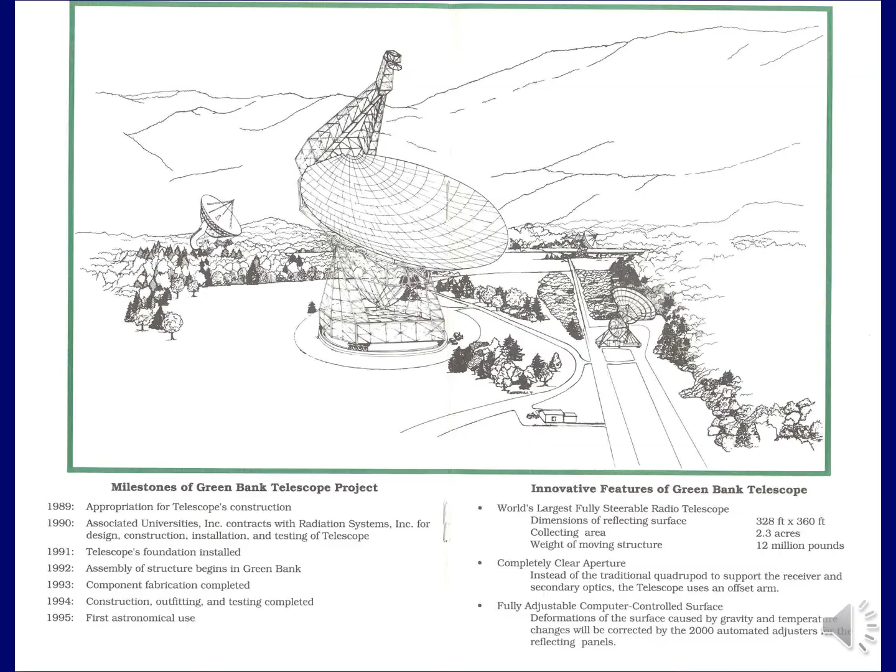We passed by it every day, going down and back, plus heard all the crane operators talking as they were doing the various operations and everything. So it was really quite interesting. We had kind of a great sidewalk superintendent position there.

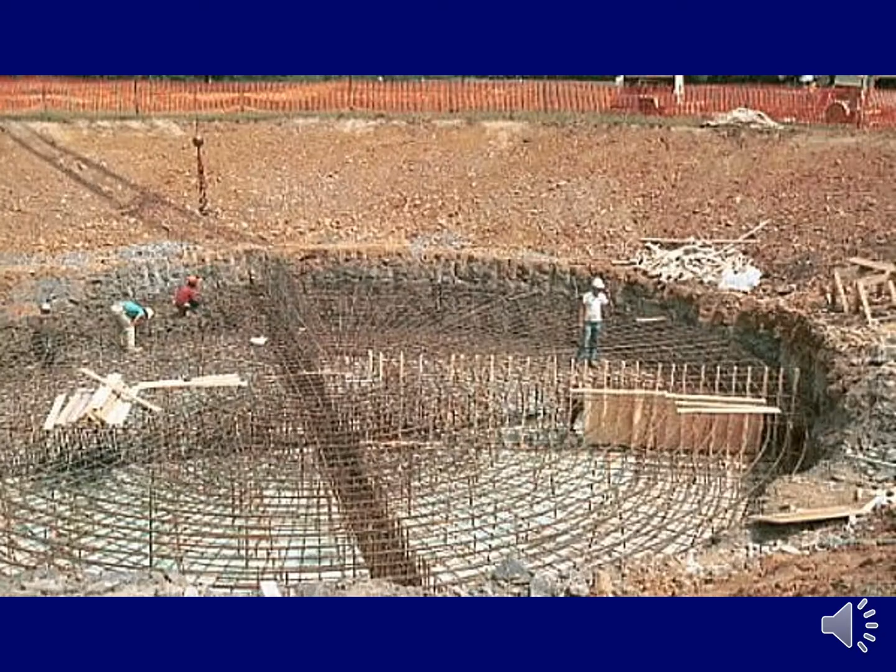Okay, getting to the actual construction, this is the pintle bearing. This is the pintle room to support the pintle bearing. It's a huge slab of concrete here, and you may wonder why was it so big, because the weight was actually carried by the track.

Well, actually, this was sized to carry the horizontal load, particularly the wind load. It was literally to keep the telescope from being blown off the tracks at, I think it was, a 90-mile-an-hour wind was the requirement. So you've got this huge pedestal buried in the ground just to keep the telescope from blowing away.

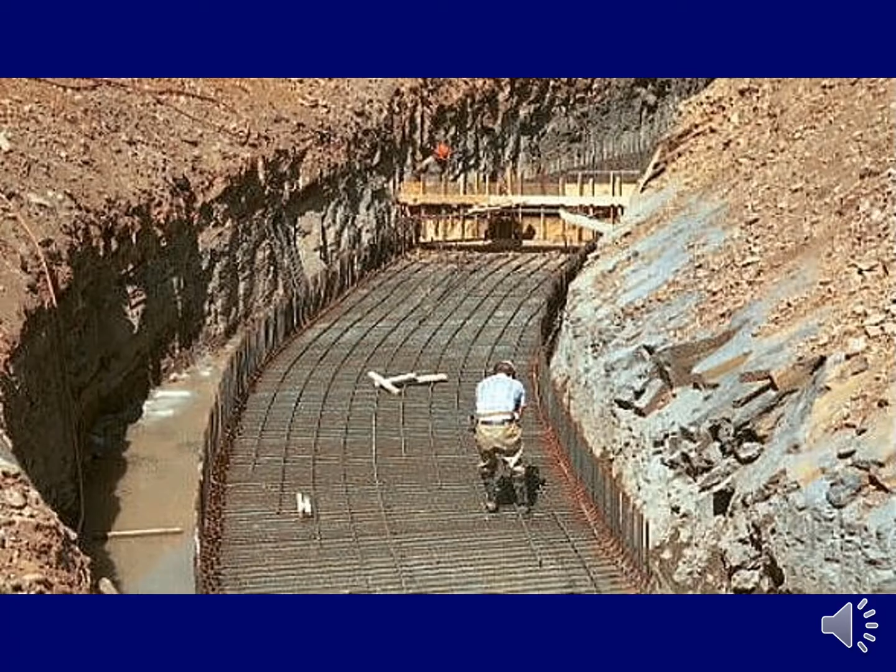This is the foundation for the track. Now, at the time, the estimated weight of the telescope was 12 million pounds. It kept creeping up and creeping up as it went, and later I'll show you when we weighed it, it was 16,727,000 pounds. So the weight had increased considerably.

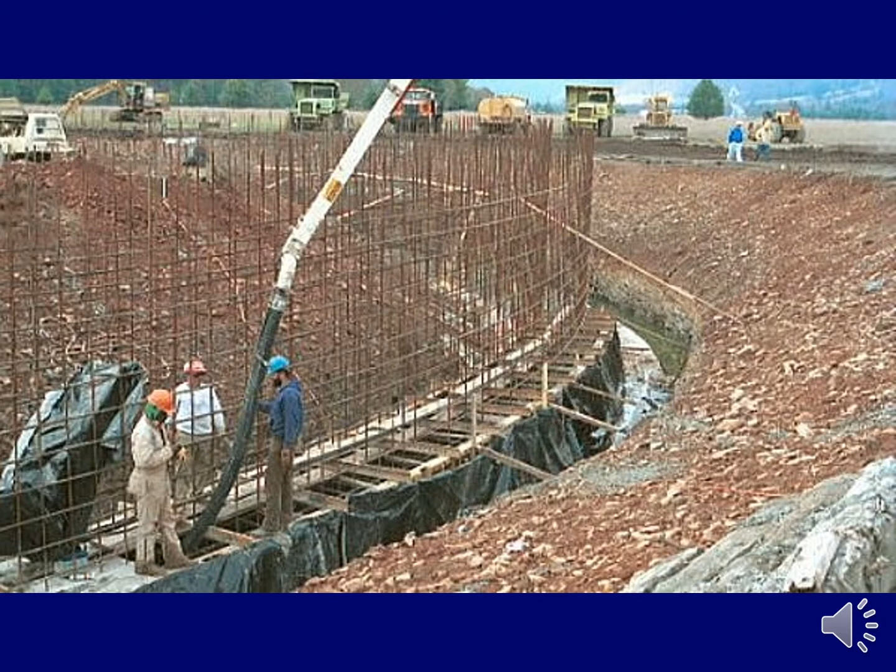But the foundation, the wall looked like a T structure, where this is the bottom of the T. And after they had poured this, they decided to make the vertical portion actually wider than it is at the top. So they added another foot to the vertical section down near the bottom. Don't believe that shows up quite here.

Another thing was the specification called for the foundation to go down to the shale. There's the layer of soil and then the shale down about 15 feet, I think it was. But it did not say that they had to be uniform, just down to the shale.

Well, the contractor, Radiation Systems Incorporated, RSI, that was the initial contractor. It changed hands a number of times. They kept getting bought by other companies, Comsat and Vertex, and I forgot who the last one that bought them. But anyway, it changed hands a couple of times during the process, but the crews all remained the same. They left this project alone, even though they bought the parent companies.

But they made the track even all the way around, which turned out to be fortunate because of the symmetry. If different parts of it had been different thicknesses, you'd have a different spring constant, so to speak. But as it turns out, it's uniform all the way around, and that was just a fortunate thing.

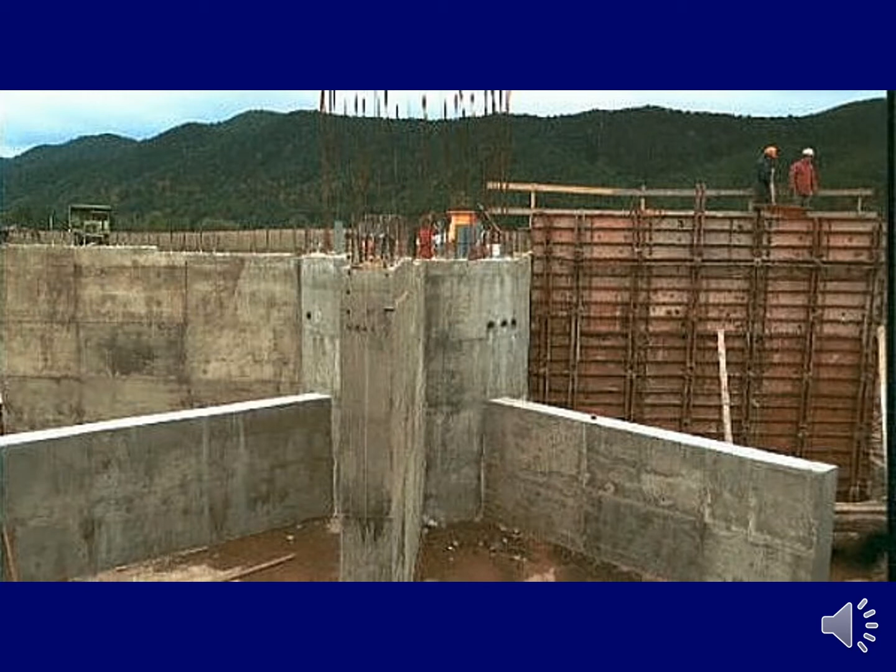Notice these grade beams. There's still 4 grade beams exposed that you see, but there's 4 more underneath the ground that you don't see anymore. This was really designed to be a sturdy pintle room, to, like I said, take care of the horizontal load of the wind on the telescope.

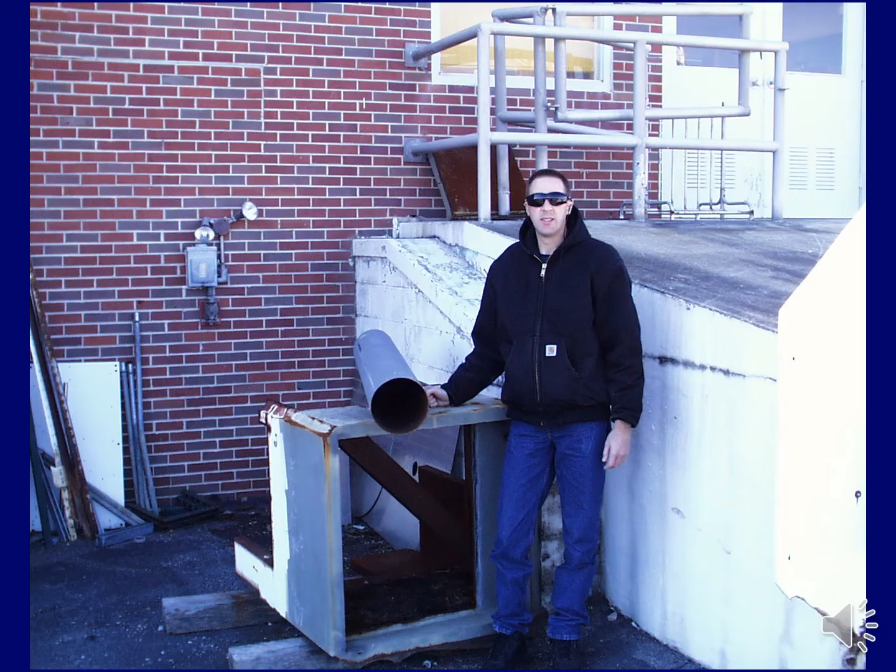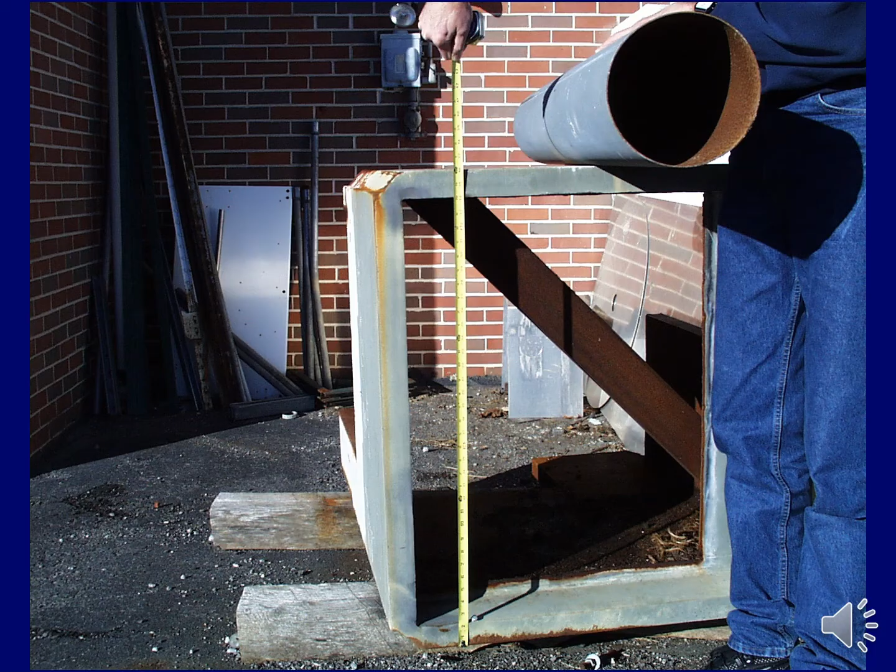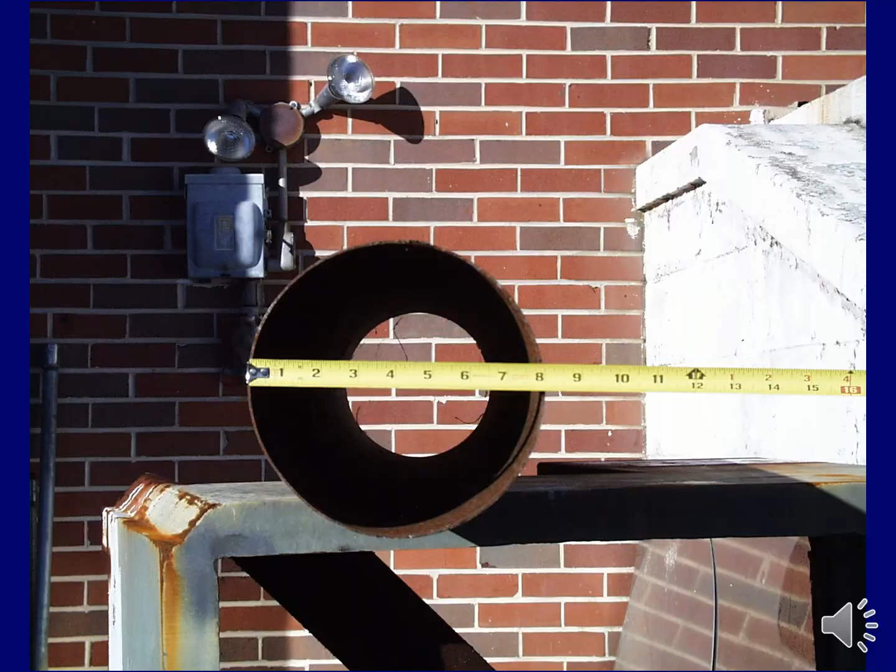After the project was winding down, we scavenged some pieces from their scrapyard before they were all hauled away. What we got here is the 2 largest and smallest pieces of structural steel. You see the bottom one there is 2-inch thick plate, 36 inches square, and the lightest part is 8-inch tubing. So when you're up on the very top of the telescope, that's what you're being supported by, something that looks almost like a beer can.

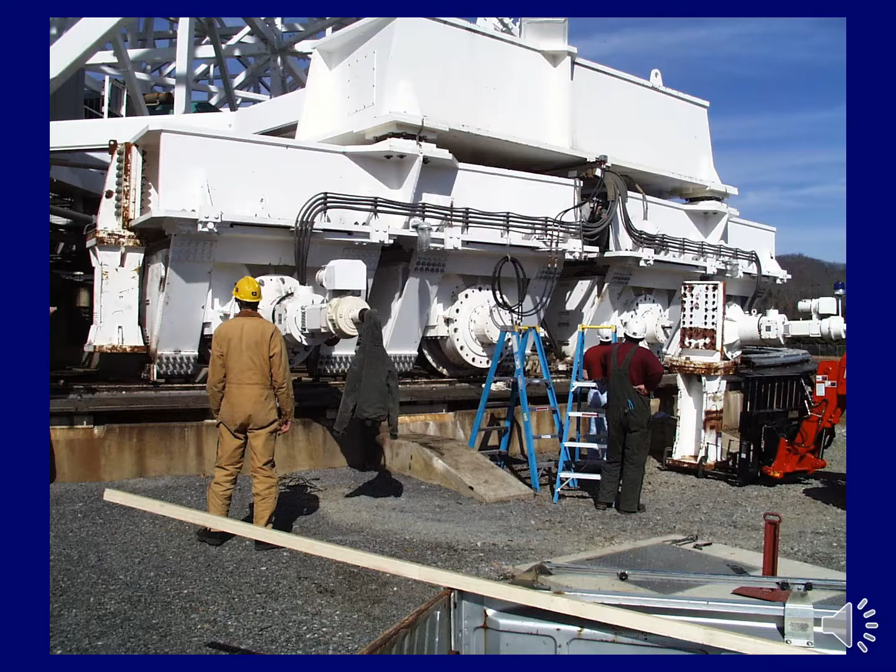One interesting aspect from the metrology standpoint is the wheel system. There are a number of features here that might go undetected, but when the wheels were turned at the factory, they were cut on a taper so that the wheels are actually cone-shaped. If you were to just have one of these wheels and rolled it around, it would naturally roll in a 105-foot radius. So there's no steering needed to keep the wheels in line.

And the way that was set up, on the end cap of the wheels, right here, you take this cover off, the shaft is actually bored out all the way through. And in the pintle room, there were 4 openings that were left, one in each quadrant of the pintle room, and the door opening. And so you could slide an alignment telescope into the bore of the wheel, which put it right on the axis of the wheel.

You sight through the telescope into the pintle room to a point that's at the same elevation as the track and in the center of the pintle room. In the floor of the pintle room, there's a brass marker with a punch mark in it. That's the main coordinate that the telescope was built by. Everything worked from that brass benchmark inside the pintle room.

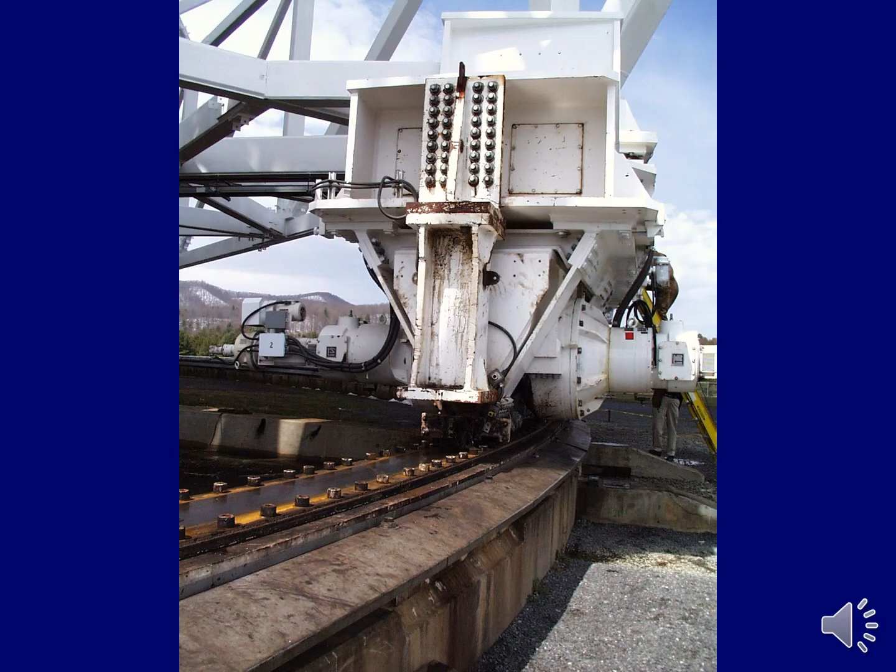When the wheels were first aligned and placed on the track, Bob was very concerned about the taper, to make sure that it had this 105-foot radius taper. And so he asked us if we could measure the taper on these wheels in place. And so after some head scratching on how do you tell if the tilt is due to the track or the wheels, to make a long story short, we did come up with a method to actually measure the taper of the wheels. And it turns out one of the wheels was out of spec.

15 of them were good. One of them was out of spec. It had to be removed. They had to put the telescope up on blocks on that corner, pull the wheel out, send it back to the factory, have it returned, and brought back. Fortunately, this was found early on while they were still building the Alidade, and it didn't cause a big problem because normally they had to turn the telescope as they were erecting the steel. They had to rotate the telescope underneath the crane. So it turned out to be quite fortunate that we caught that early, and they were able to leave it parked.

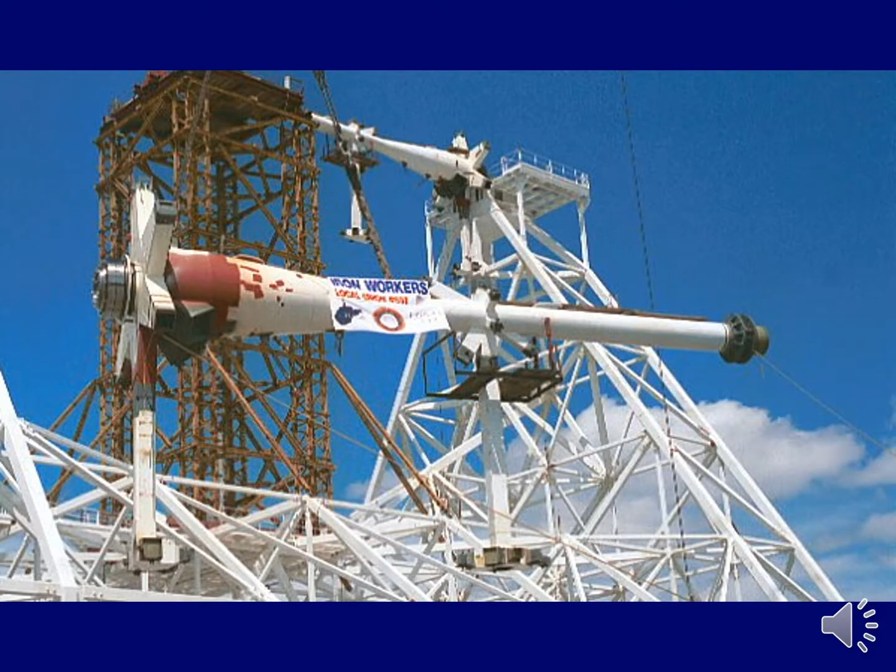Okay, we're at the point here where we're getting ready to put the elevation shaft in, but let me back up some things that happened prior to that. According to the finite element model, they knew how much these towers were going to deflect under load. So with no load, they wanted these towers, I think they were something like an inch longer or more space than the shaft. So when the shaft was actually completed and put in, they had to use a jack and pull the two towers together in the unloaded position. And the idea being, when the rest of the telescope was completed and the loads were all redistributed, the thrust load on the bearings would essentially be zero.

One of the things that happened, and I don't remember exactly the details, I wasn't involved in it, but one of these members got out of alignment during the welding and construction. And so they needed to literally bend one of these members to get it back into the proper alignment. So one weekend a specialty contractor came in, and he actually bent this big member back into the proper alignment by heating it.

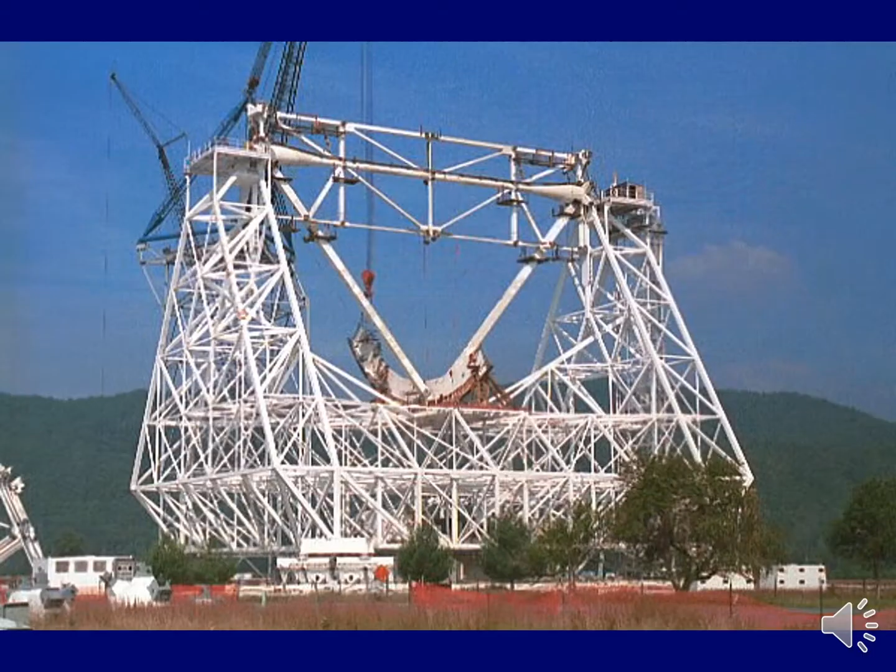Here you see things progressing on what's called the box structure, the part that rides on the elevation shaft. Now, I mentioned earlier that the center of the telescope was determined by this place in the pintle room. Well, there was a plumb bob on a music wire that was hung from the alidade that hovered right over that point in the pintle room that determined the center of the telescope for the surveyors to keep their benchmark. So everything was built based on that point in the pintle room until it became covered and you couldn't see it.

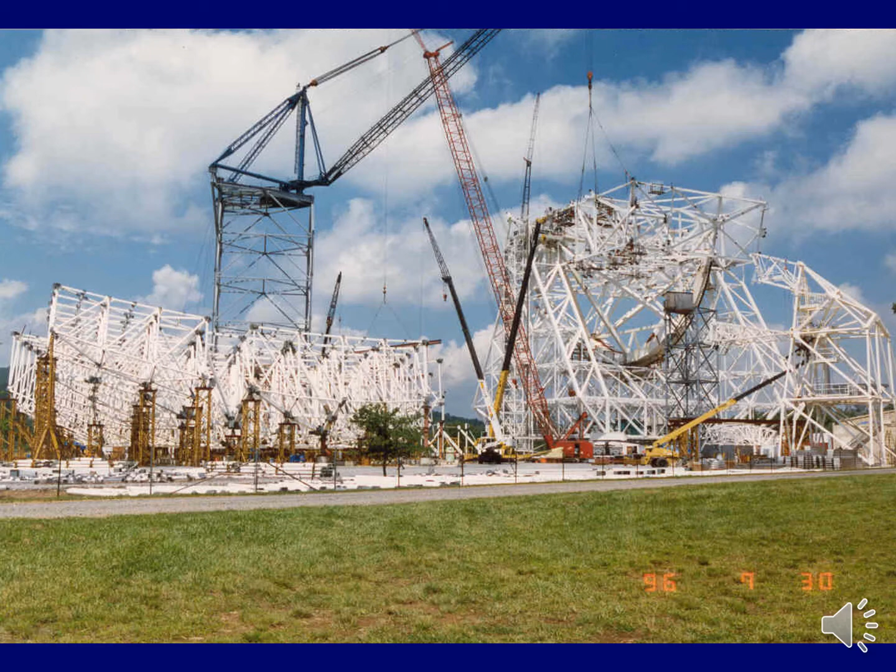Now you're starting to see the bull gear being added in these diagonals. So while this was going on, building the box structure it was called, there were other parallel things going on. Over here you see the top of the feed arm. The top of the vertical feed arm is being fabricated down here on the ground on solid anchor points, so that this would be pre-outfitted with the actuators for the subreflector and so forth. And here you see the subreflector being put together.

Over here, the backup structure, the part that holds the panels, the reflector panels, is being built. And right here, this tower, right up here is where the surveyor worked. This would be the vertex of the telescope, of the reflector. So the instrument man sat up here at the vertex and directed the alignment of the backup structure.

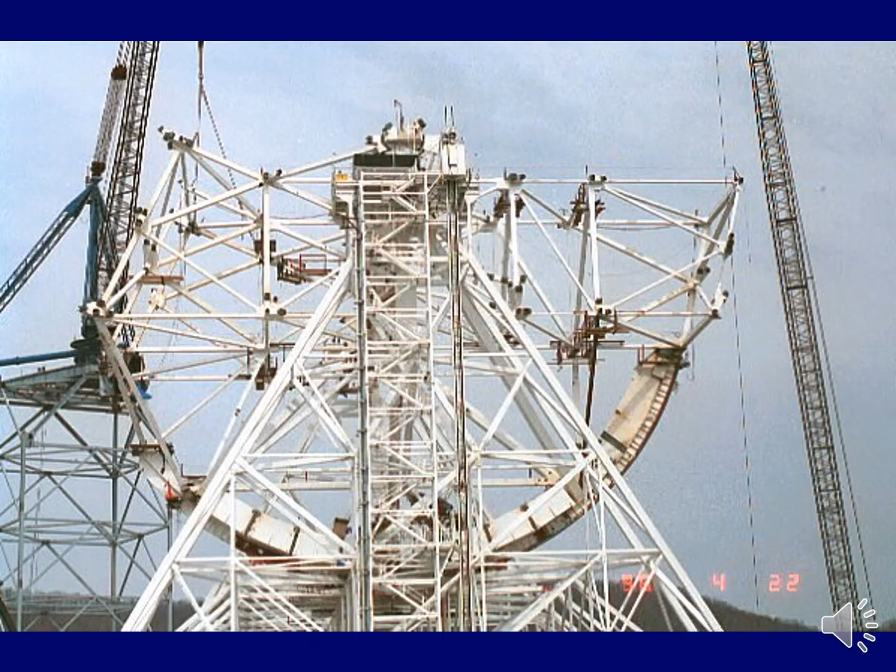Now you see the box is beginning to take shape. There's still one more layer to come out of the paper, but it's taking shape, and the bull gear is being installed still, and you can see the beginning of the horizontal feed arm where it's going to go out to the left here.

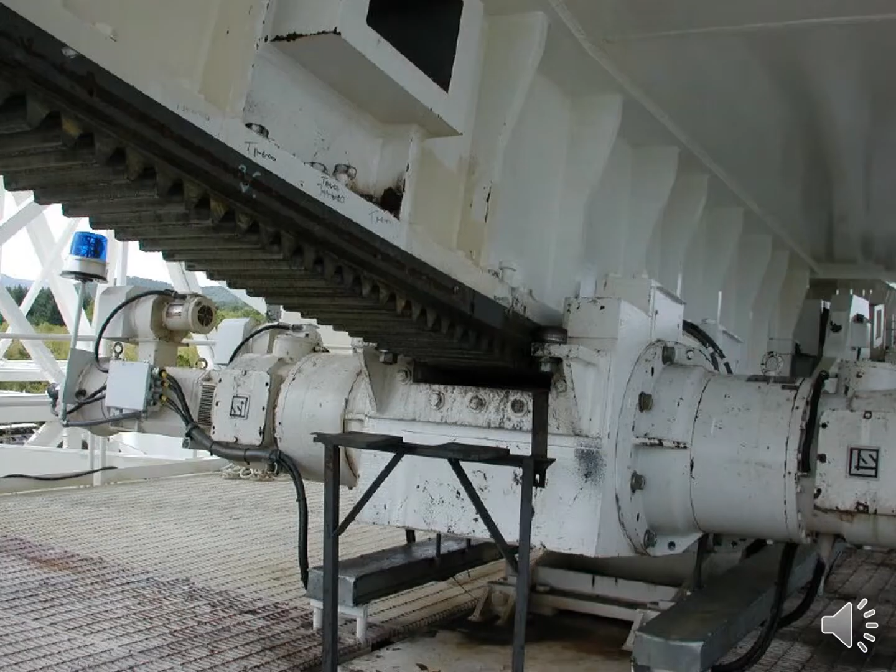The bull gear is an interesting arrangement also. A lot of thought went into the design of this. The bogie that drives the gear, the pinion, is actually pivoting on an arm back behind here that you can't see. So this is actually on a lever arm, and it rides on the gear itself with these cams to keep it... the transverse motion. And there's another cam you can't see here that rides on the gear itself, on the top part of the gear. It's not a good view, but the gear is wider than the flange that's holding it. And so they had this elaborate procedure to align in and out on the bull gear with shims and so forth that fit under here.

And so this thing was lined almost perfectly until they actually operated the telescope, and what they found was that the gears shifted circumferentially. The design was very big on the radial control, but it kind of ignored the force on the gear, and so this all had to be redesigned. The mounting mechanisms, and I don't remember exactly how they did that. I wasn't involved in that part once we determined what the problem was. But they had to add some additional fixturing there in order to hold the gears in the circumferential direction.

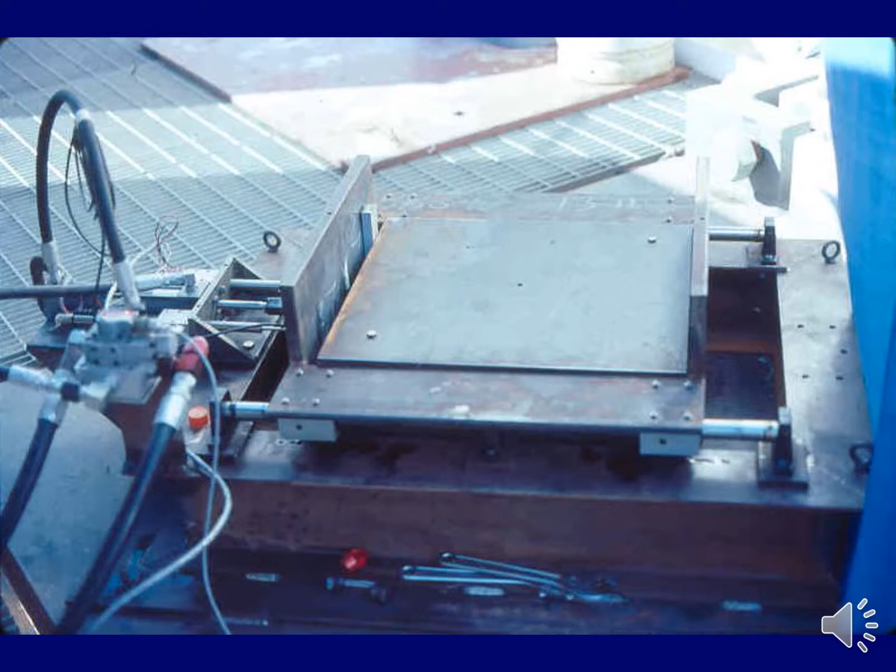And so John was really concerned about the thing ringing like a bell. And so he convinced Bob Hall that he needed to run a test, because they had estimates for what the damping coefficient was. In other words, if you pluck it, how long would it take for it to ring down to an acceptable level? So he convinced the project manager to let him run an experiment.

So he built this shaker machine. It's a hydraulic cylinder with maybe 1,000 pounds of weight on it, and it would oscillate back and forth. This was put up on what they call the dance floor, the top of the elevator there, near the elevation bearings. So he convinced them to weld this thing down one weekend and let him play with it with the telescope, when it was at about that stage that I showed where the feed arm was completed.

I wasn't involved in that either, other than one time I did go up there when they were running an experiment to observe, and they started oscillating this thing back and forth, and nothing was happening, and then after a few minutes you could begin to kind of feel the handrails wiggling, and a couple more minutes, it's like, I can feel this for sure.

And a couple more minutes, there was a shack where the ironworkers hung their tools and their belts. I looked over in the shack, and all the tool belts were just swinging back and forth. It's like we were in a ship. So I'm starting to get nervous. And John's just happy as he could be, getting his data from accelerometers.

I'll never forget that. I was just thinking, I didn't want to have to call Bob Hall and tell him we broke the feed arm off doing an experiment. But it turned out to be useful data, because he experimentally showed that the damping coefficient was only about 1/2 what they had estimated. They were off by a factor of 2. And so that gave the design engineers a little indigestion.

Another thing was the way the contract worked. The NRAO provided the actuators. Most of the actuator companies build the actuators to do a vertical lift against gravity. In this case, the actuators not only had to move in a piston motion, they had to resist forces perpendicular to the piston motion, because the panels are connected to this actuator, which is connected to the backup structure, and you're shifting it from 5 degrees to 95 degrees elevation. You're carrying the weight of the panels, in some cases, in the plane perpendicular to the piston motion.

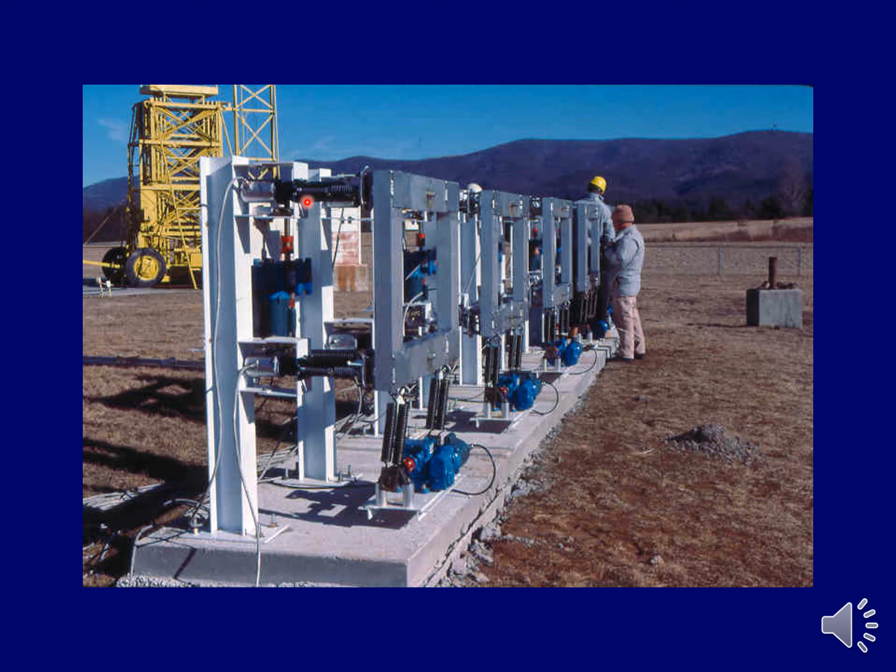So they solicited proposals from a number of companies. I see 5 test fixtures here that were constructed to basically exercise the actuators. Here you see two actuators. I guess there maybe are four altogether on this rig mounted horizontally, and there is motion put into them through this. There's a cam mechanism here that basically puts side forces on the actuators.

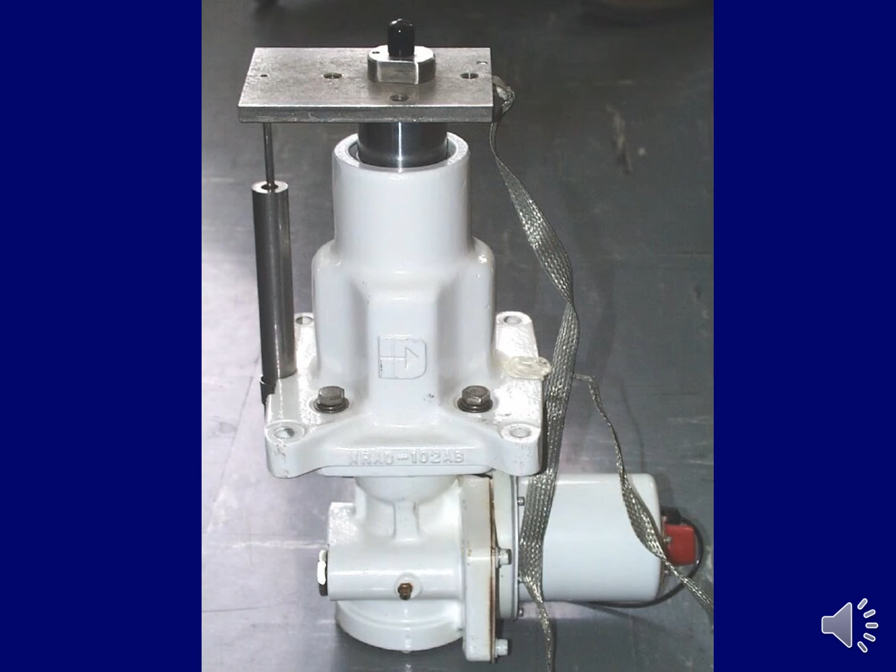Again, I wasn't involved in that part other than just watching, but I think all of the manufacturers failed except one. The survivor was the company that wound up on the telescope today, and you can see this is really quite beefy. The actuator is a casting, heavy duty, nice thick shaft. This is the extra mounting for an LVDT that NRAO added.

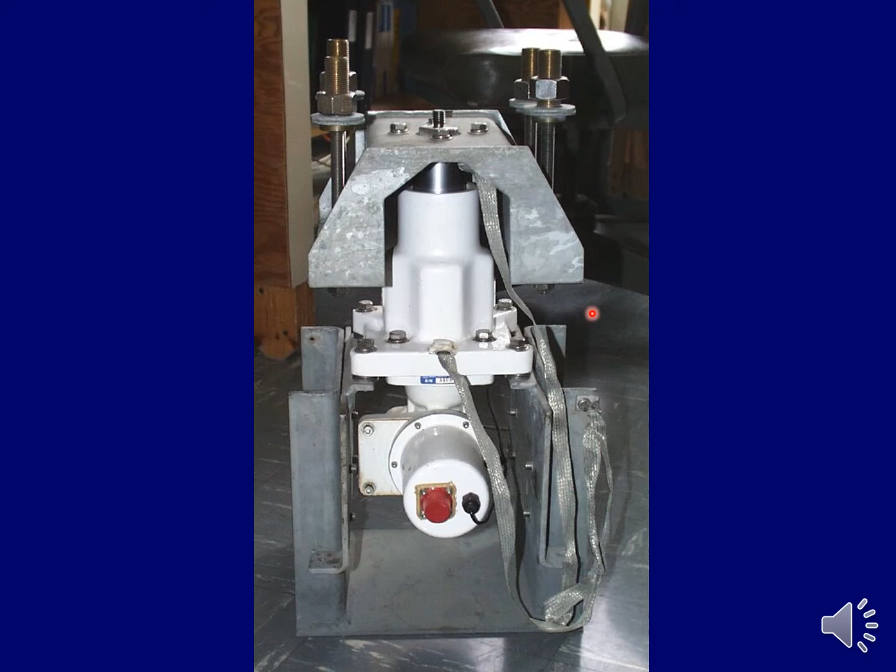Here you see the arrangement with what they call the hat bracket and the actuator bracket. This bracket here fit on the backup structure, and it was initially bolted to the backup structure, and these two halves, there was a lot of adjustment between this part and this part, so you could manipulate the position of the actuator. Once the position of the actuator was finalized, they came back and they welded all of this down so that there was no chance of it moving again. The only bolted part would be the actuator itself.

The panels sat on these studs, and there's this bushing right here that's threaded on the outside and the inside. The inside threads thread down on this stud, and so to attach, the panel fit between these two washers. There was a special wrench that went into the bushing. You could turn the bushing and raise or lower the panel, and then once you've done that, you needed to adjust this jam nut to hold it in place, to lock it.

And so there was a special tool developed. I think Tim Weadon did that when he was doing the panel setting. And also on the actuator, there were special provisions for this stud right here to attach the panel setting tool, which Tim Weadon will talk about more. But the bottom line is all this was pre-designed and built into the telescope way before it ever came down to setting any panels.

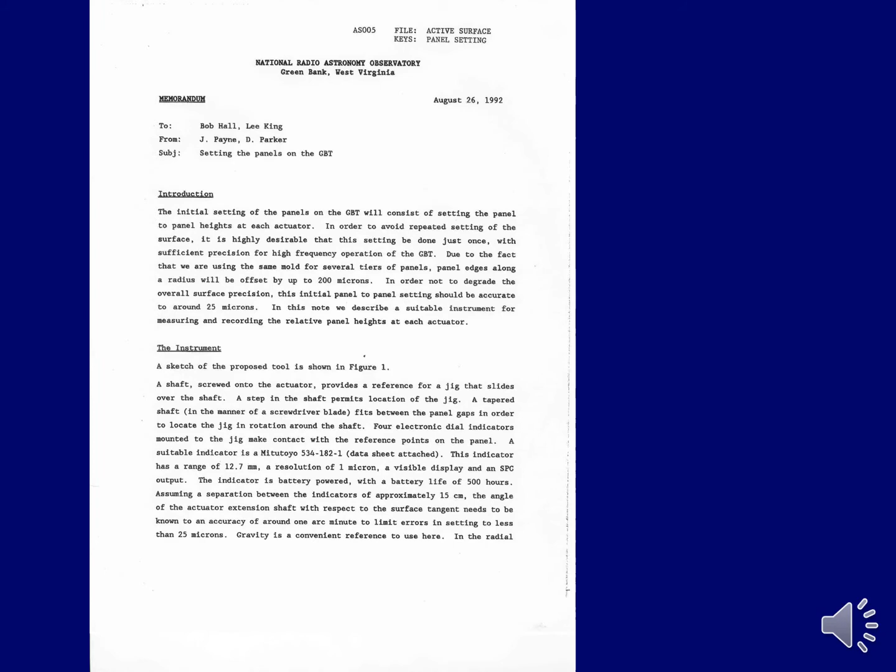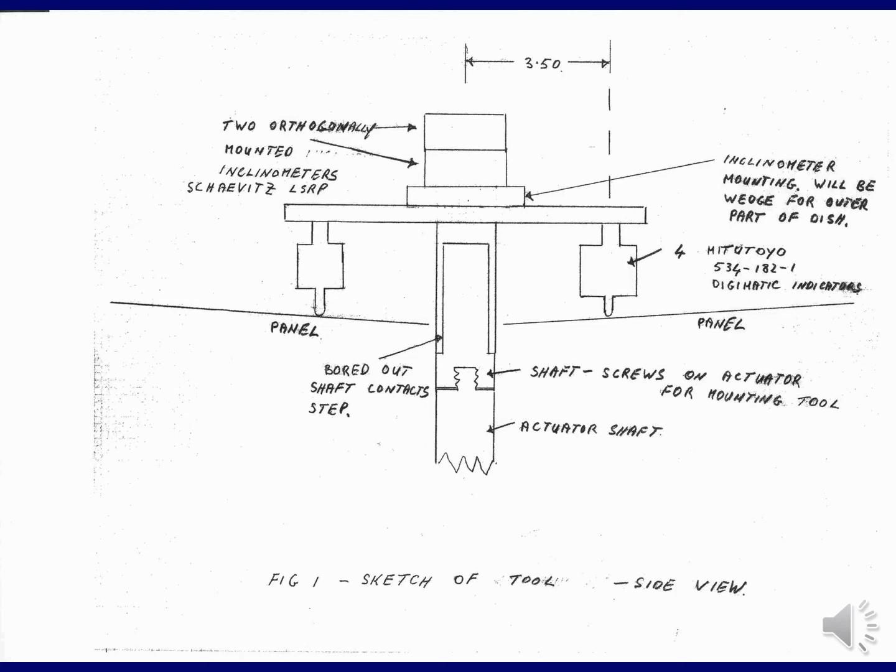Well, John realized that we could do better than that, and back in '92 he proposed a better way to set the panels, including a sketch of how we would use digital indicators and inclinometers and attach it to the top of that stud that I just showed you on the actuator. And there'll be much more about that later. This is one of the more successful parts of the innovation. But all this was built in.

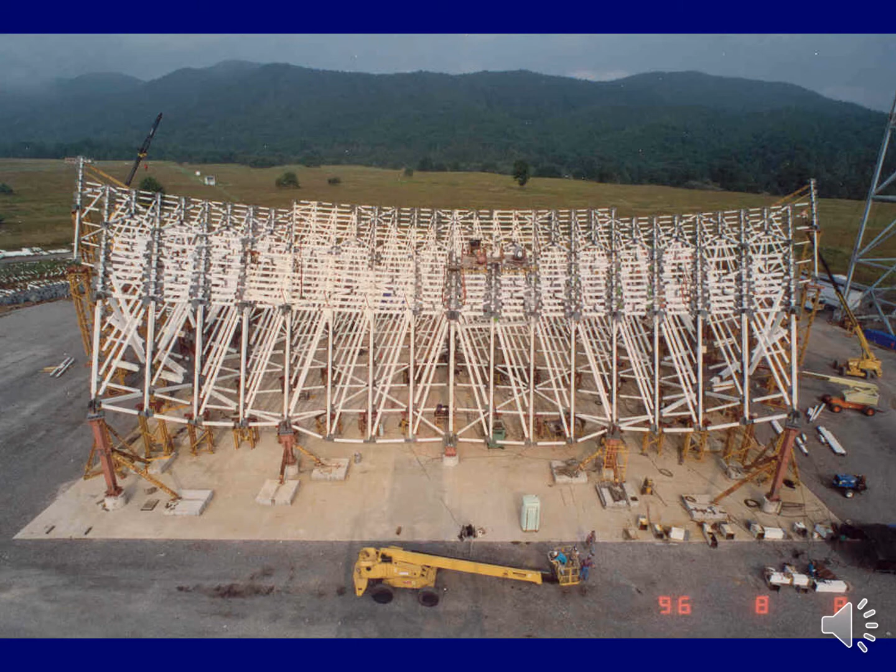So when they were building the backup structure down here, it was built on a combination of hard points that would match the hard points on the box structure, in combination with temporary supports for the points as they built it out. This was a very, very interesting part too, because these points had to match up the angles and everything with the mating points on the box structure. And it turns out there were some problems there. You can see better.

There were only a few points that matched to the box structure, and this was built at one angle. I don't remember if this was the bird bath, or I think this was called the bird bath, or it may be the rigging angle. There were two different angles that they used, and so one of the tricky things was the geometry.

Every joint in this backup structure is unique. There is a left and a right version of each one, symmetric about the center line. But other than that, every joint is totally unique in order to make it match up to these hard points. The shop drawings to generate these joints drove them crazy. This was a major headache. Unlike most things where you have symmetry and you can build 30 of one piece or something, every one of these had to be custom designed.

The story that I heard was that they had a summer student that was really, really good at the geometry and really understood how to do these and could whip them out. Well, comes the end of the summer, they're not finished with all the shop drawings. And the student's getting ready to go back to college. And so there was a panic. This is the way I heard the story anyway.

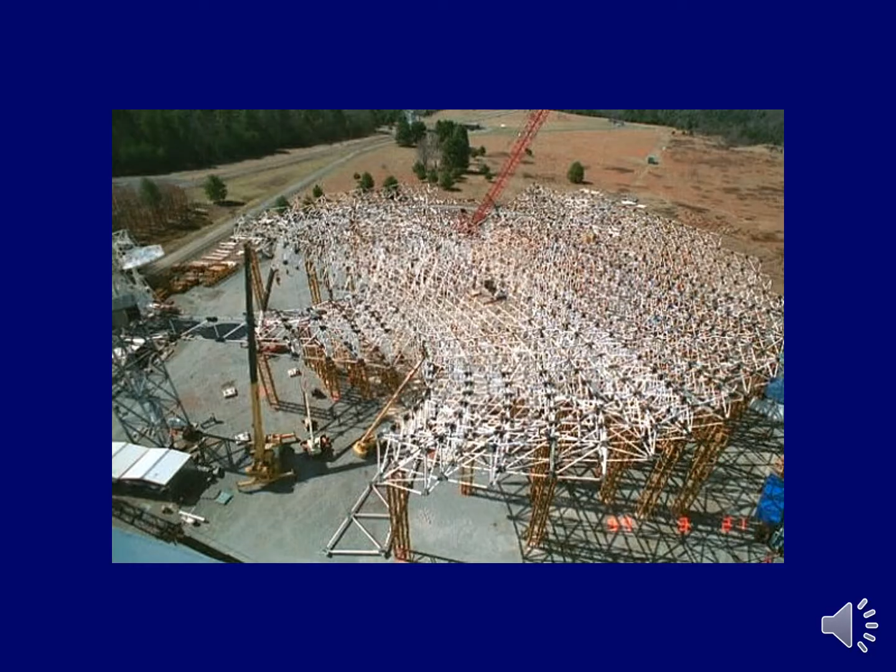And so they basically approached the student with an offer he couldn't refuse. I think it was something like a year's tuition or a year's college expenses to stay over through the fall semester to finish it, which he did. I guess he was probably pleased with how it worked out for him. But that could have been another major delay trying to find somebody else that could do those drawings.

Here you see a little more progress on it. Here we are about complete. Now, one of the things that was also confusing that began to show up as they got closer to the vertex is that if this was aimed at 90, if this was built at 90-degree elevation, the top chords and the bottom chords would be directly on top of each other.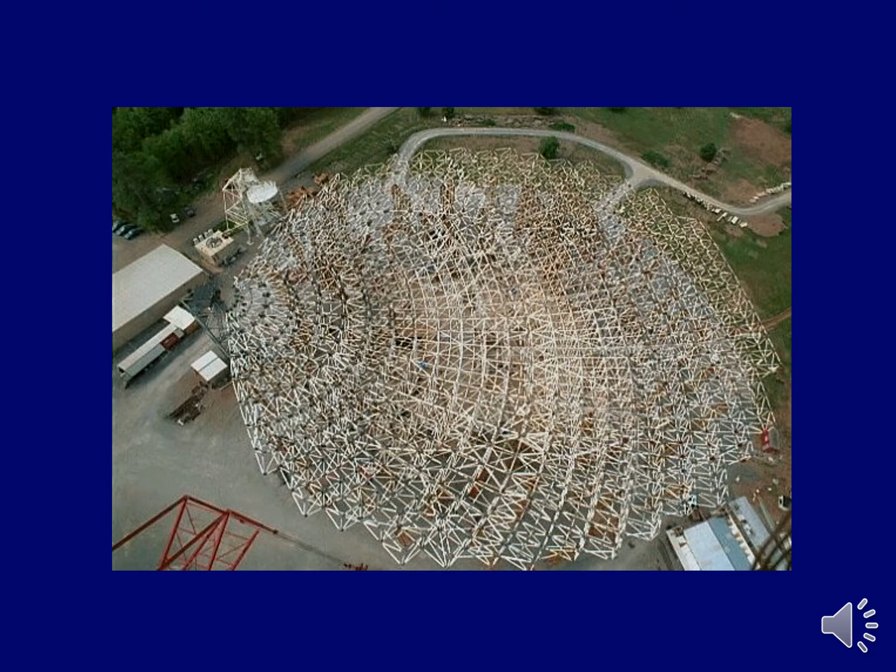But since it's built at a different angle, you can't use a level to align between the top and the bottom. And so as they got closer to the vertex, is the way I remember it, things got so far out of alignment that they were questioning, like, wait a minute, is something wrong with these joints or something? These aren't plumb. And then it's like, oh, yeah, they shouldn't be. And so then it was like, well, how many of them did we make plumb that shouldn't have been plumb? And so they had to do quite a bit of rework there.

Well, then it came to breaking the thing apart in segments and putting it up on the telescope. Originally, they were going to contract with a super duper crane to come in and do that job. But as the project slipped, that crane was no longer going to be available. And you may have noticed it was beyond the reach of the derrick. They could reach half of it from the derrick, but not the other half. And so it left them with quite a problem of how do we get it over to the derrick to pick it up. We could move the telescope underneath the derrick to place it where we wanted it, but we couldn't get the pieces to the derrick.

So they had another solution. They initially thought they would put in a temporary guyed derrick crane in the center of the backup structure, and from there they would hand the pieces over. Well, when the guyed derrick came in, at the same time, there were huge blocks of concrete buried in the ground at various locations away from the telescope that were dead man anchors for the guyed derrick. But when it came in, the guyed derrick had a lot of rust and pits, and the ironworkers threw up their hands and said, we're not going to do this. We're not working with that. You got to do something else. So, okay, they scrapped that plan, sent that thing back to the junkyard, and covered up all the concrete blocks.

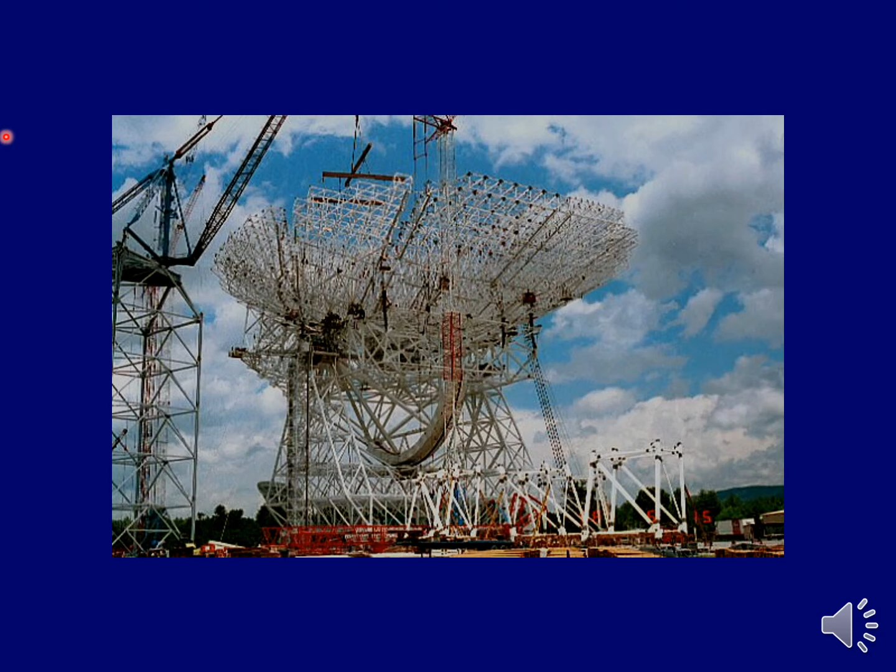Another interesting thing was how they had to rig these sections. These things were delicate, and they had to be suspended in such a way that when they were brought into place, they were just about perfectly in alignment. So it took a lot of thought on the rigging. You see one spreader beam that's picking up two other spreader beams that are picking it up at four places. So basically the module was lifted at four places in a particular arrangement. There were come-alongs between the spreader beams, and so the lengths of those cables from the come-alongs had to be just right to make it hang in the right way. And of course, everything had to be balanced because the laws of physics require that. So they did a lot of head scratching on the rigging to pick each piece up.

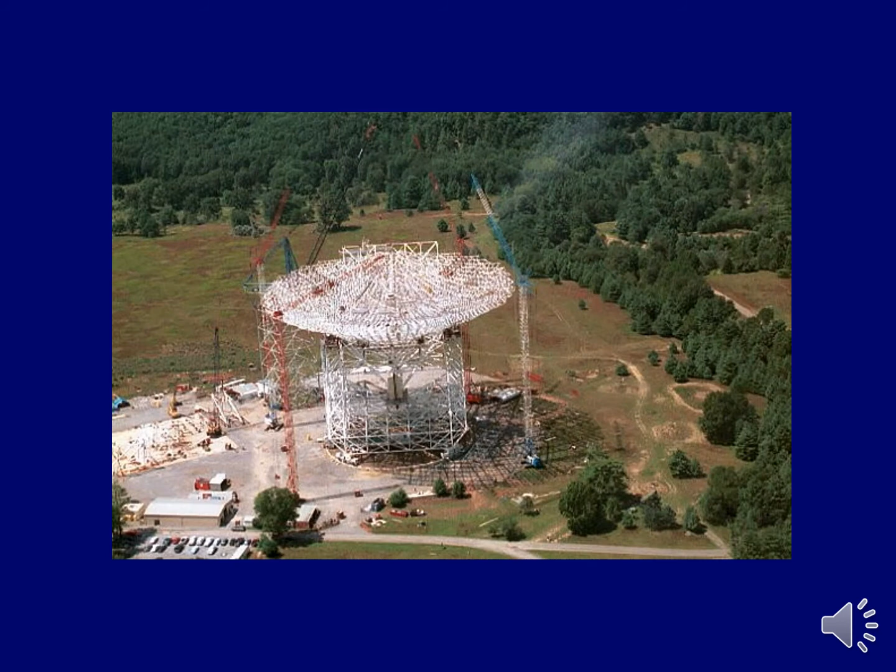Here you see we're about finished with getting the backup structure. That was a major milestone. And it had been over here on this pad. You can see the reach from the derrick could not get to the ones over here. Once the backup structure was complete, then they started building the vertical feed arm. Here you see the vertical feed arm nearly complete, and here's the top of the vertical feed arm over here off to the side.

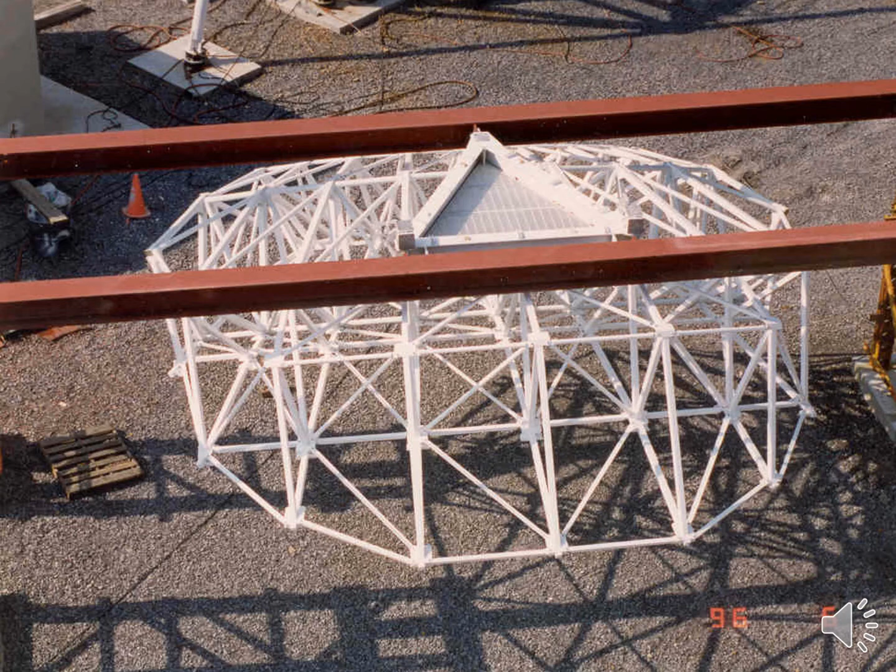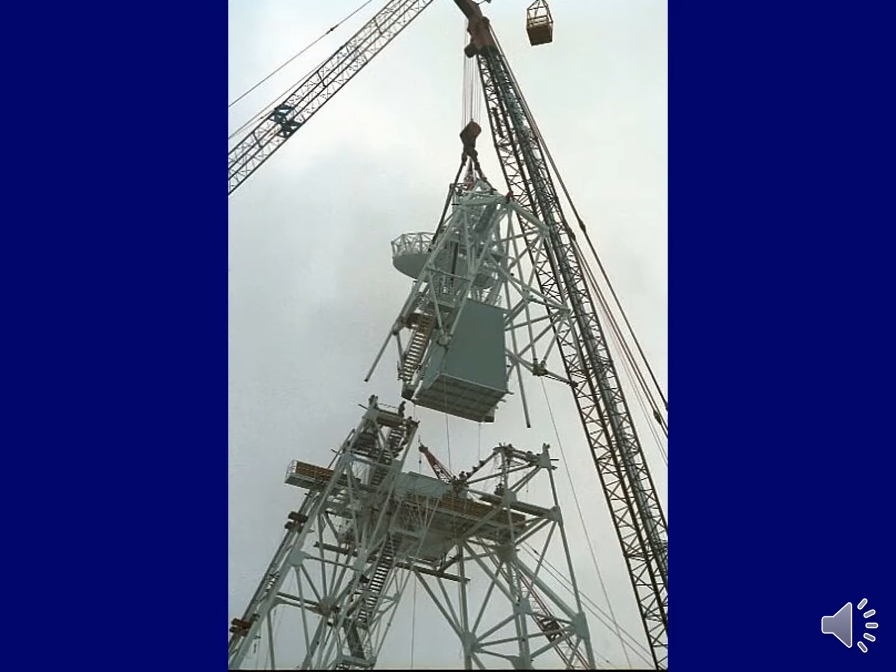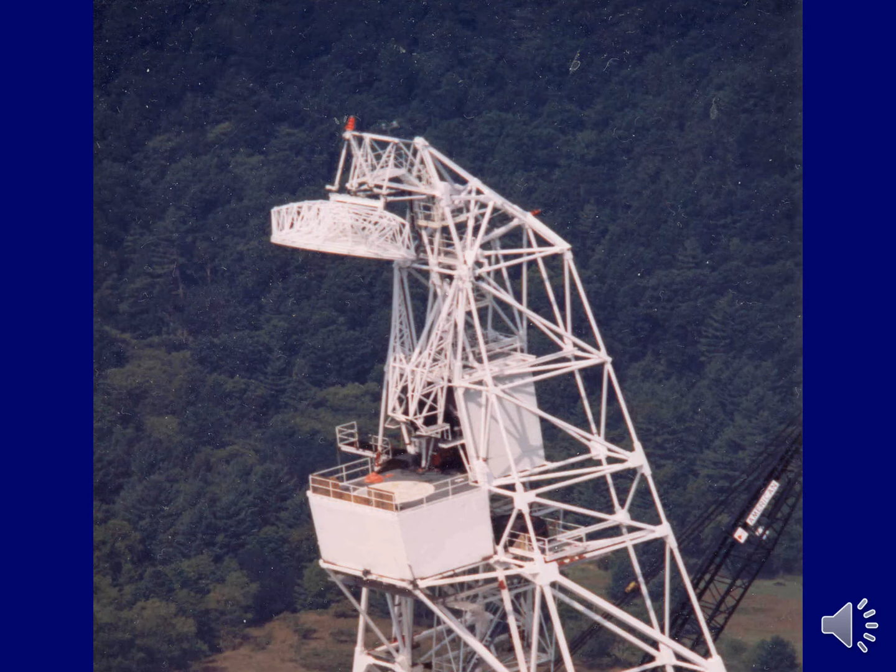Another view. The receiver room was added next, I guess, after this part was in. Another view. You can kind of see some of the symmetry. If you imagine the vertex was 4 meters back over here, you can see that there is a radial symmetry back to this point over here.

And there is a circumferential symmetry on the top chords. The problem was that it had to meet the weldment on top of the box structure. Going back to that, when they first brought the first parts up, they didn't meet. They didn't match. The hard points on the backup structure did not fit properly to the box structure, and people didn't talk about it too much.

But I think what I heard was that there was a foul up between the two design groups in what angle it was being built at, the bird bath or the rigging angle, and so pieces didn't fit right. Moreover, when they started cutting into some of those joints to modify them, they found that inside the joint it wasn't built to the specs.

There were some stiffeners that were supposed to be inside those boxes that were not there, and they only found that because there was an error and they had to cut into it to modify some things. So the net result was, to correct that problem took probably a year, added probably a year to the construction schedule. Major problem.

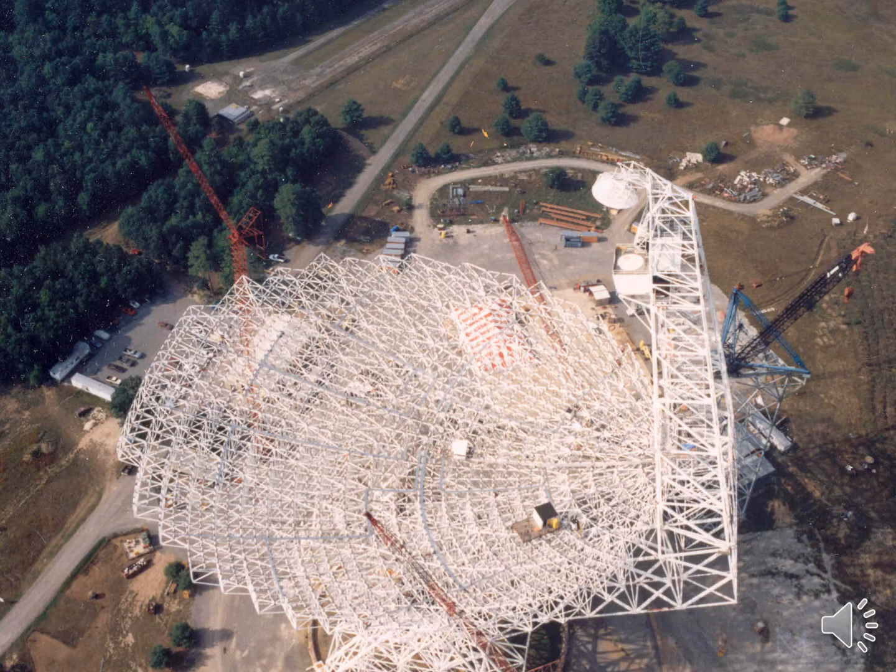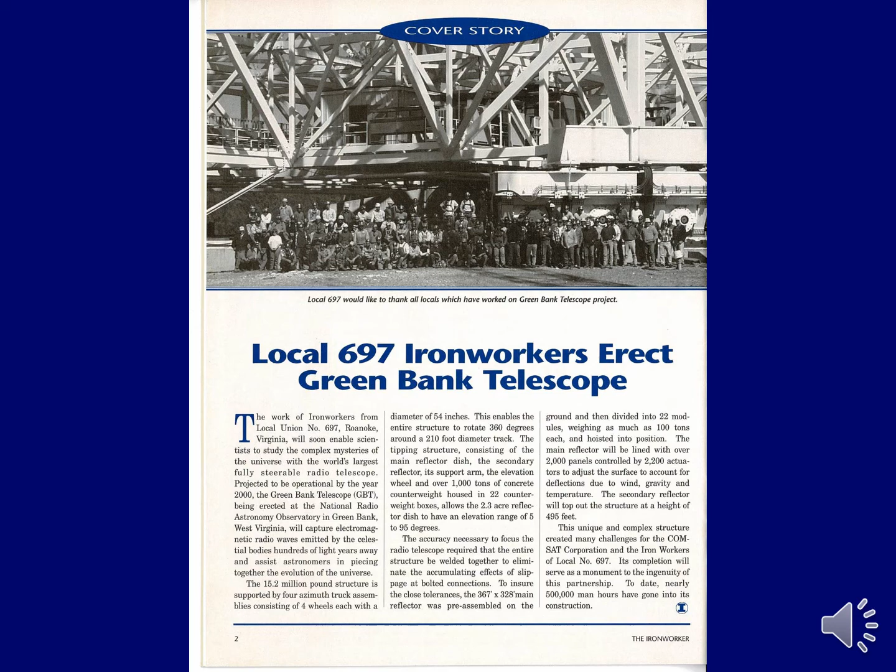However, the panels were made on a mold very, very accurately. They were routed, the edges, so that the size of the panels were very accurate. All of this was measured on a coordinate. They had bought a nice Cartesian coordinate measurement machine for this job, and so every panel was measured with a coordinate measurement machine very accurately. So these things were well known, but they were still worried about making it all fit.

So their plan was they would line the actuators approximately right, put the panels on, starting in the middle and working out, and set the gap. Then they were going to do photogrammetry of the surface. Then they were going to come back and yux the alignment of the actuators and pin them. And then when everything was just right, they were going to come back and weld them, all from underneath the surface of the telescope.

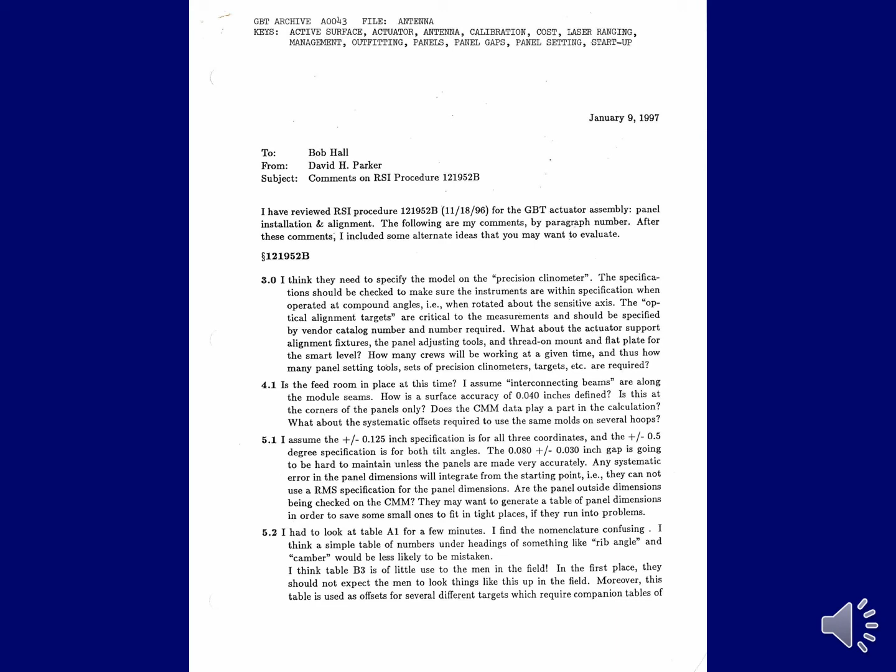Well, what I pointed out in this memo, it's A0043 if anybody's interested, was that they didn't need to do that. If they put all of their emphasis on aligning the actuators themselves before the panels went on, the panels should just fit like a bearing. There shouldn't be any leeway. And so RSI categorically rejected the proposal.

Bob Hall was a very big proponent because he saw that he could get something here. He could get a better telescope with the panels aligned with the alignment tool, and if RSI brought them into spec originally, we could cut about 6 months off the schedule. Like I said, they categorically rejected the idea, and Bob kind of got mad with them and said, "I'm trying to help you here, you guys."

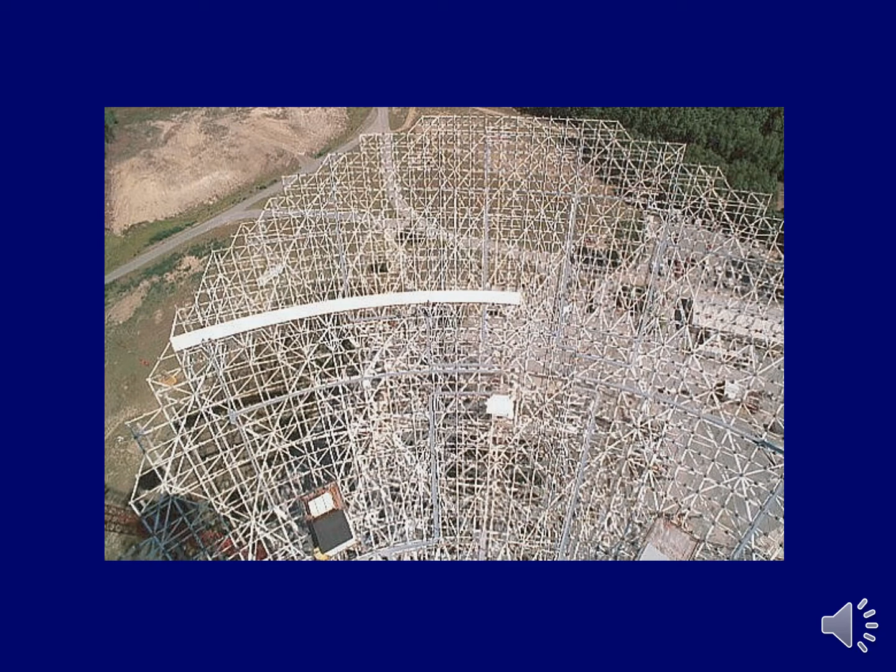So, what they did was they went away and they actually did the test. They actually put the first row on the way I was proposing. And what they found was it worked. All they had to do was very accurately survey the actuator locations, lock them down, weld them, and then the panels just dropped in like a glove. Like I say, I think it cut about 6 months off the schedule.

I'll show you this picture here. This is the only picture I know of with Lee King on the telescope. Lee King was the chief engineer for NRAO. Over here you have what they call the hot dog stand in the center of the reflector. This is where the instrument guys worked.

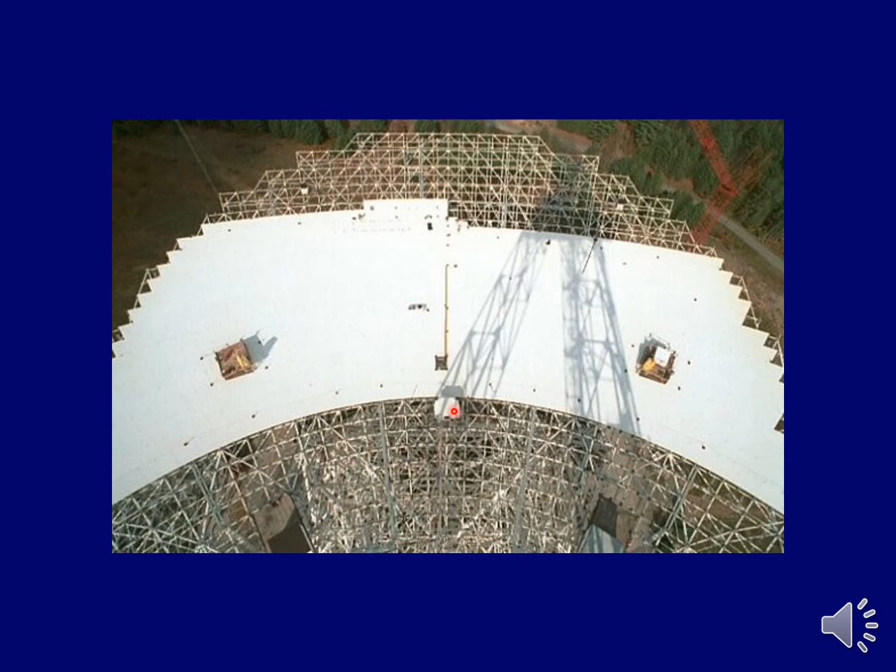So the instrument men would give directions to the iron workers on the alignment of each actuator. They'd line it up and move on to the next one. Then the welder would come along and do his thing. These were stationing places where they could bring the panels up by the crane, put them here, and then they could pick them up and take them out to where they needed them. I believe this is the hot dog stand here.

You see a little more of the symmetry of the backup structure here. This is a good view. And again, it had to come down to meet these locations.

In fact, it became so complicated to get these joints right. Bob Hargraves had a woodworking shop at home, and he literally went up and made plywood models of what the joints needed to look like, cut them out of plywood, and told the fabricator, "I need one of these." That's how some of these joints got designed.

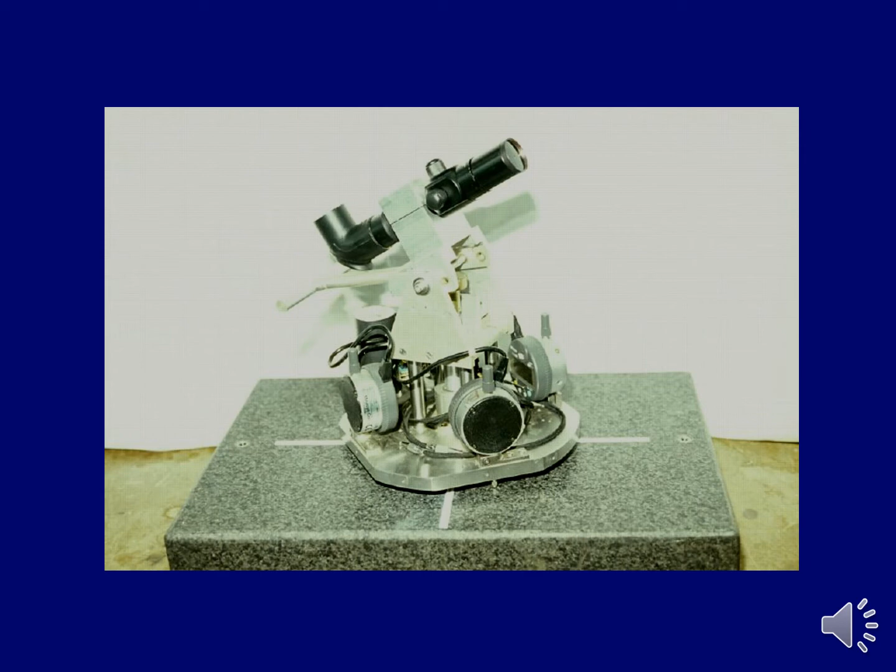Goes back to John's proposal about the panel setting tool. Tim's going to talk more about that, so I'm not going to go into it too much, but this gives you an idea without the covers on. You had 4 digital indicators. This sat on a stud that mounted on top of the actuator. My group worked out how to calibrate the instrument, the inclinometers, and so forth. Here you see one in place.

Another thing was we convinced them to put barcodes on the panels so that each panel was uniquely identified. And so you'd go up and you'd read the panels, and that told you where you were on the telescope and what the inclination angle should be and so forth.

I want to point out some things about the panels. Early on, when we were talking about the panel setting tool, RSI agreed to nip the corners off the panels so that we would have access to the top of the actuator stud, put our anchor in. They also agreed to leave these spots on the panels unpainted so that the indicators would actually touch the metal panel and not be thrown off by the thickness of the paint. Then, of course, these holes were for the adjustments of the hat bracket. They had to have access in there to run the brass bushing up and down.

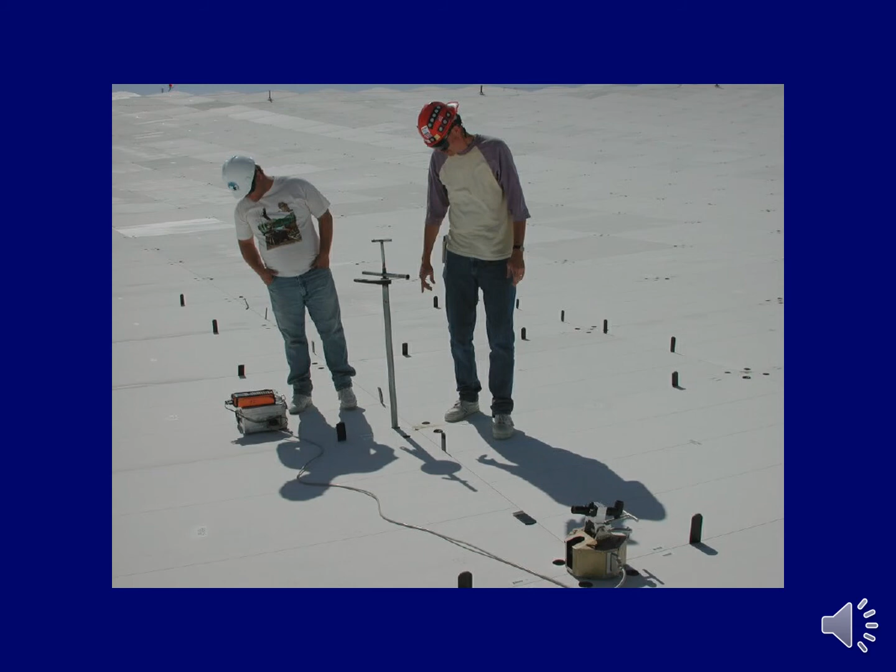Here's just more of the crew setting the things. This is the tool that turned that brass piece that I showed you, that brass bushing, and then this turned the jam nut. I think Tim designed that. That's Tim Weadon.

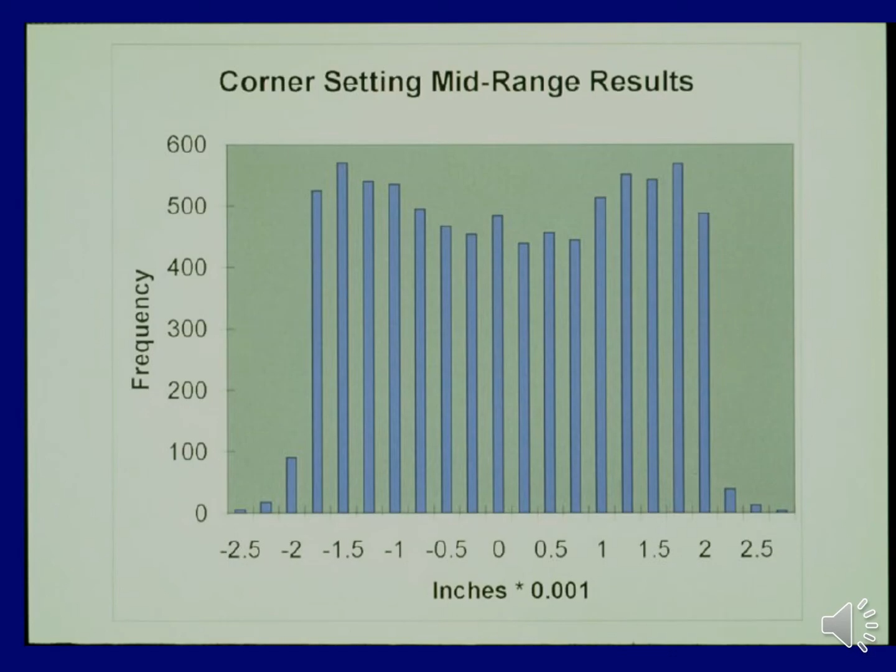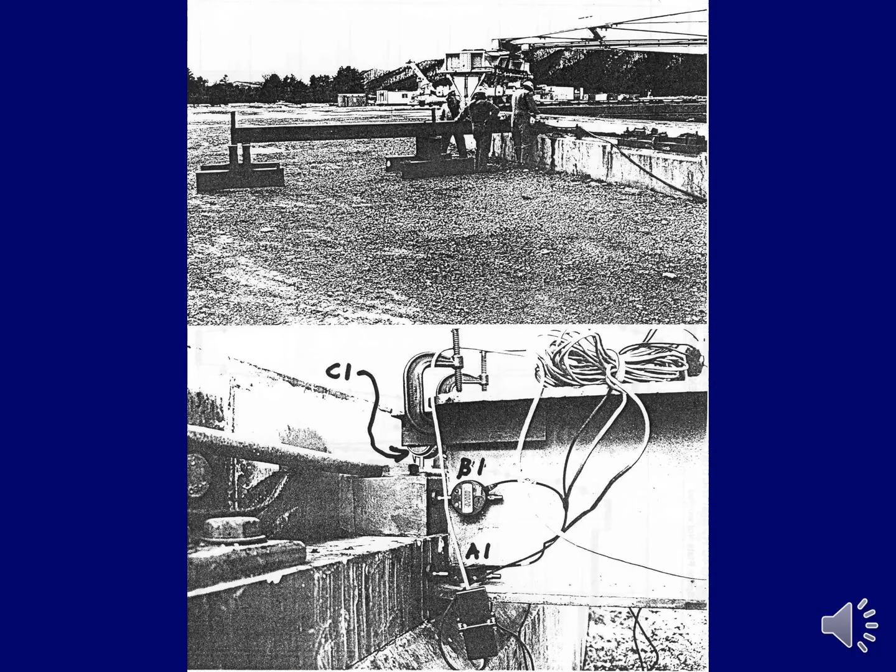So we dedicated the telescope, and everybody's happy, and we're finished, but not quite. Immediately, problems developed with the track, and it was not understood. And so they asked the metrology group to help them make some measurements of the track and all.

So here's one arrangement where one of the problems is if you want to measure the vertical deflection of the track, where do you anchor it to? Well, you got 4 million pounds on a corner on this wall, and so actually the ground is moving as the telescope comes over. So the contractor provided this for us. They had a scrap beam of steel that they put out here, basically a lever arm that we could use to anchor it back further away from the telescope to put our indicator.

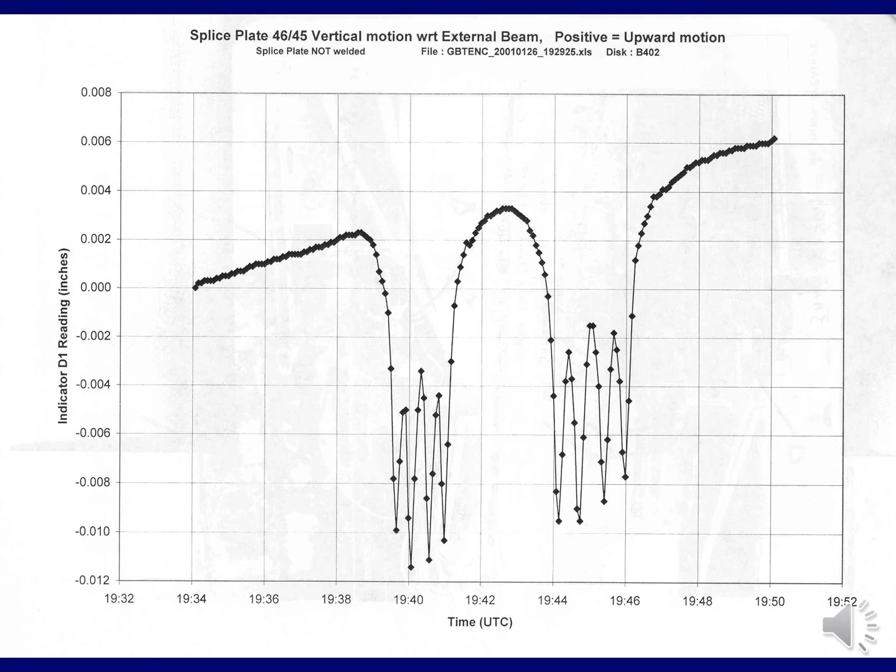But you see, so what happens is right here, the track would be depressed, and even between here it's still depressed, but not as much as under the wheels. So kind of an exaggeration. The track would go down, back up, and down, and back up, and down, and back up as the thing goes by.

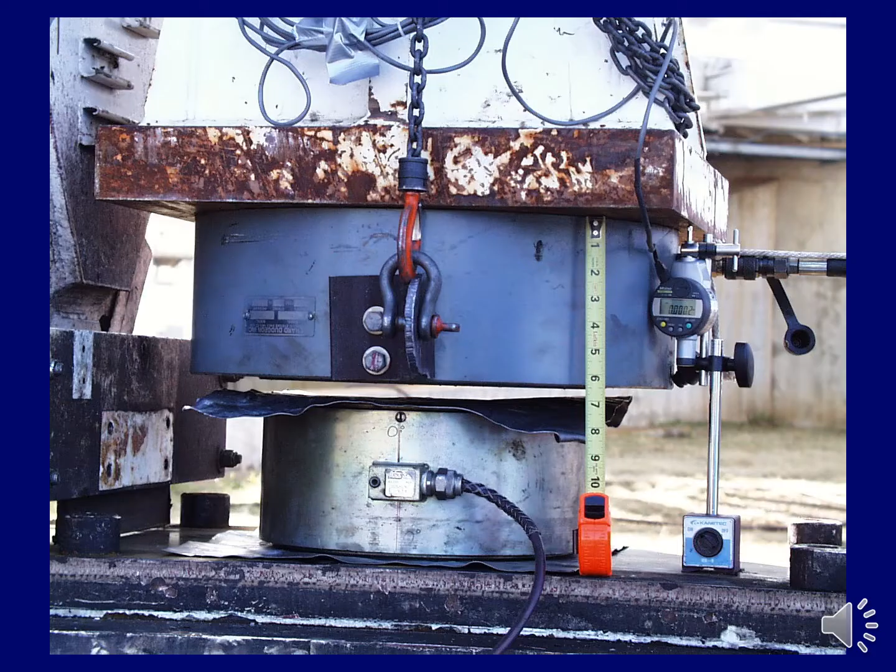So one of the problems was that it was designed to support 12 million pounds. And like I said, the weight kept increasing, particularly because of the counterweights that had to be added. The specification required that if the bull gear broke off, the telescope would just bob at the rigging angle under the counterweight load. So they wanted to weigh the telescope. So that became an interesting problem. How do you weigh a 12 million pound telescope that's on 4 corners?

So what we came up with was, well, first of all, we had to find load cells. We found some 2 million pound load cells and jacks that we rented. And the problem is you've got to lift it until the wheels clear. But the contractor put a limit that we could only move the corner, I think it was a quarter of an inch or something like that. They didn't want to put a twist into those corner weldments. Also, when you start lifting it, the load increases because you're taking more of the load. You model it like a spring.

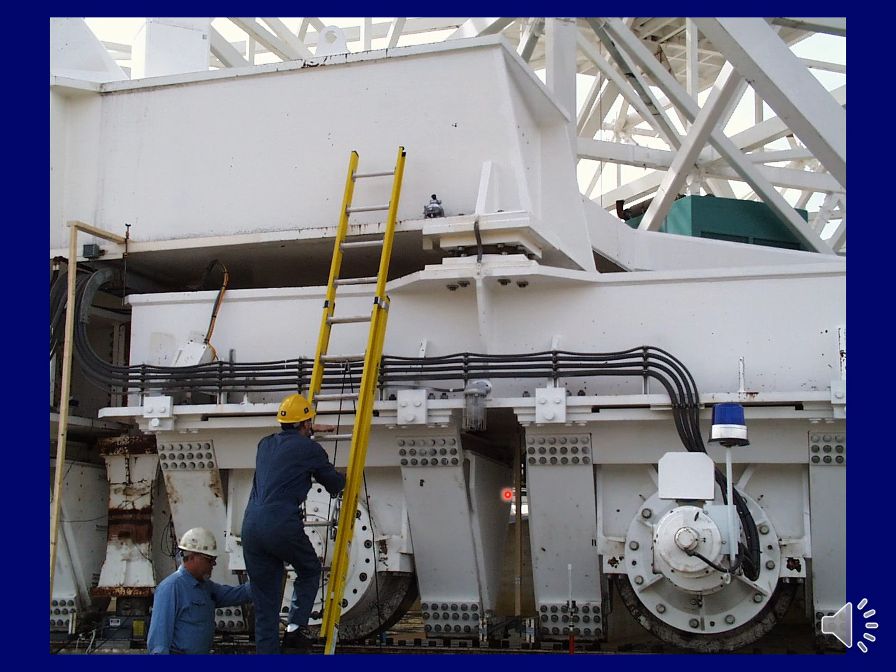So what we came up with was the idea of we would lift 2 wheels at a time, 1 wiffle beam, and there was fixturing already available to do that. And so we would lift it and measure. This is an inclinometer. We would lift it until we zeroed the inclinometer with it on the track. We did the initial lift. We jacked it until the wheels just cleared, where you could put a piece of paper under the wheels and pass it. We took another inclinometer reading, measured the angle. Then we lifted it another 10/1000ths of an inch or something like that, and got a second reading and the angle.

And so if you treat this part as a spring, just Hooke's law, and you could imagine a plot with it on the track. I raise it a certain amount, take a reading. I raise it another certain amount, take a reading. That should be a linear plot. Well, we had the 2 points with the wheels cleared, and so we took the slope of that curve and backed it back to what it would weigh without the jacks if we didn't lift it.

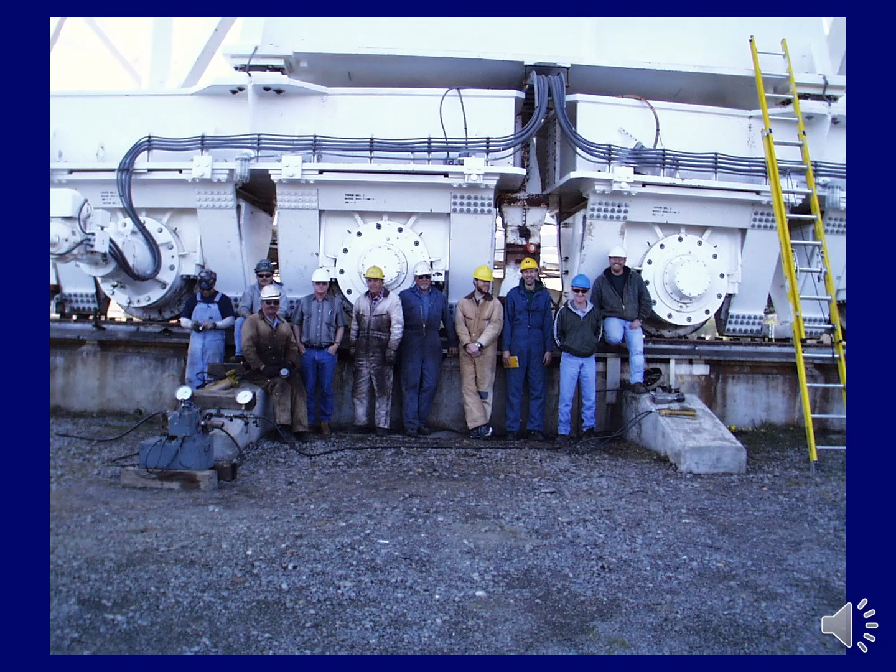So we took 2 measurements with it cleared at 2 different heights, 2 different angles, and used that to extrapolate back to what it would be at 0 angle. And it actually worked out pretty good. We came up with a final number of 16,727,000 pounds with an uncertainty of 30,000 pounds. We repeated each measurement several times and so forth, but the standard deviation for the whole thing was 30,000 pounds. So we feel quite confident that we knew the final weight of the telescope, 16,727,000 pounds.

Unfortunately, not all the aspects of the GBT were realized. But I'm going to show you there's a silver lining to this, even the part that wasn't realized. John Finley wrote a GBT memo in which he outlined a laser metrology system, basically a closed loop system where you measure the surface of the telescope and the position of the cardinal points on the telescope with a laser, and from that you can control the pointing and the surface correction and so forth.

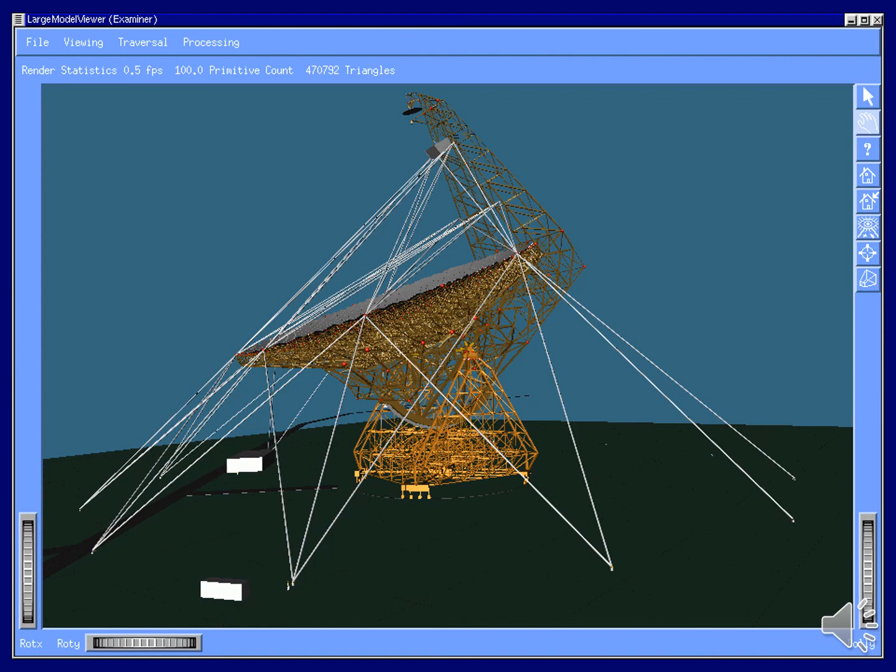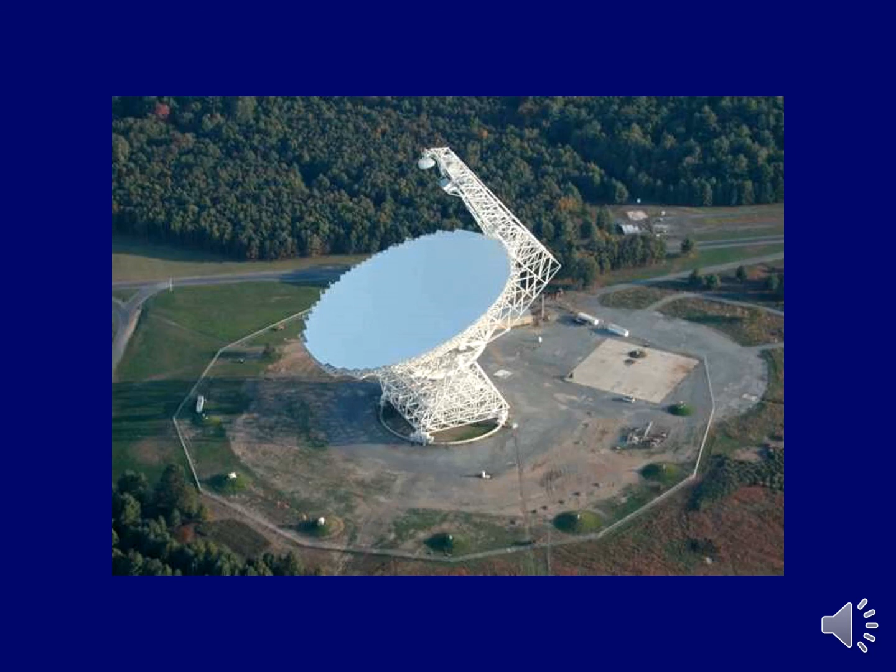And even though the project was abandoned, there's still artifacts probably still around the telescope there, particularly these monuments that people must wonder what are those things. The retroreflectors, we had 2004 retroreflectors, one for each actuator, which made a great image. I don't know if they're still there or not, but if they are, just hold a flashlight up near your eyes and shine it into the reflector, and you'll see all these things light up like a Christmas tree. And you might occasionally catch a glimpse of reflection from the sun through these retroreflectors if they're still there.

But after burning through $3.5 million of our budget and running out of time, the decision was made to postpone and what ultimately I think was abandon the laser range finding system. Some of the rationale is covered in the documents. We won't bother going through that. If anybody's a glutton for punishment and wants to read it, they can.

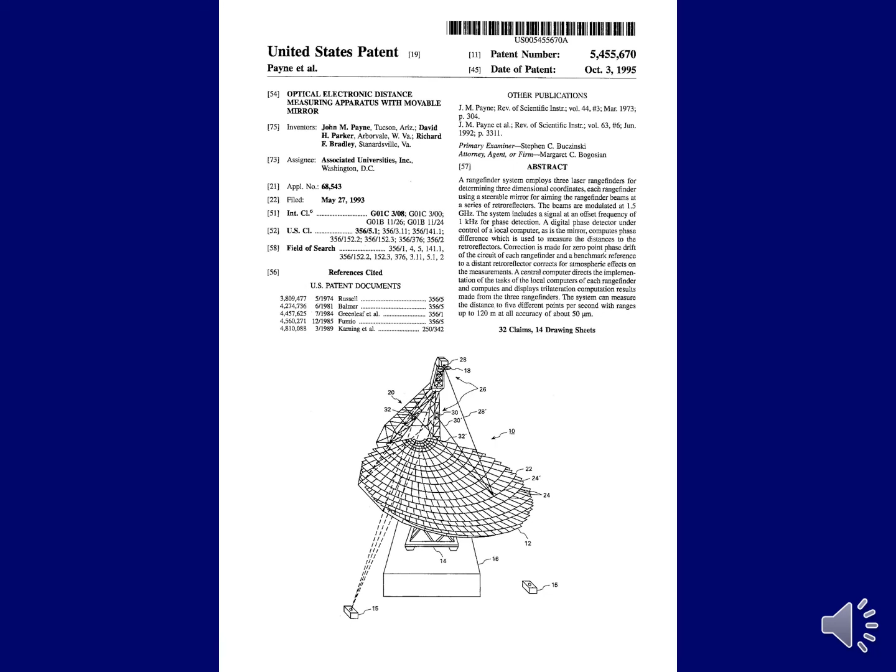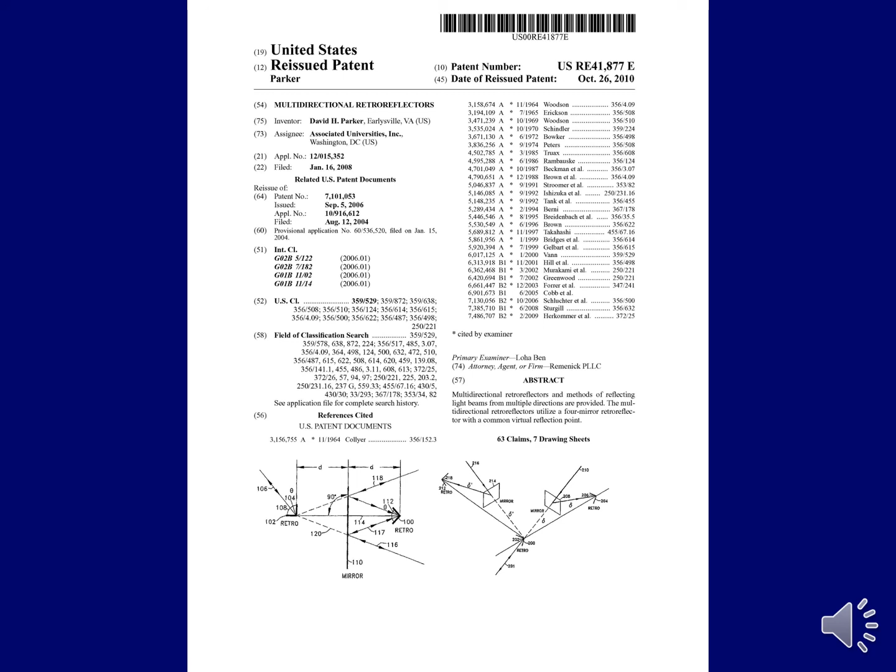But there's a silver lining, and one thing is that Associated Universities got two patents. One patent for the laser range finding system applied to a telescope, which was later picked up. I'll explain later. Also, we got a patent for a special retroreflector arrangement that lets you virtually measure to the same point from two different directions or two different instruments. Unfortunately, neither of these have been commercialized yet, but I think they will eventually.

However, Bob Bridges at what is now FARO Technologies, he was the chief scientist, or is the chief scientist at Faro Technologies. He became aware of this work through the Review of Scientific Instruments publication as well as the patent. And they were making laser trackers. These were basically interferometers that measured relative distance. They could not measure absolute distance. They have to count fringes. And so if the beam gets broken, you have to start all over again.

And they recognized the merit of the architecture of what John Payne had designed, what we call phase measurement. And so they decided that they were going to modify their laser trackers to offer this as a feature. They weren't sure how many people would want it, but it turns out that's their whole product line now. They don't make the interferometers anymore. These things are used extensively in the aerospace and shipbuilding business. So even though the NRAO effort was, as I phrase it, too far ahead of its time, it has been commercialized.

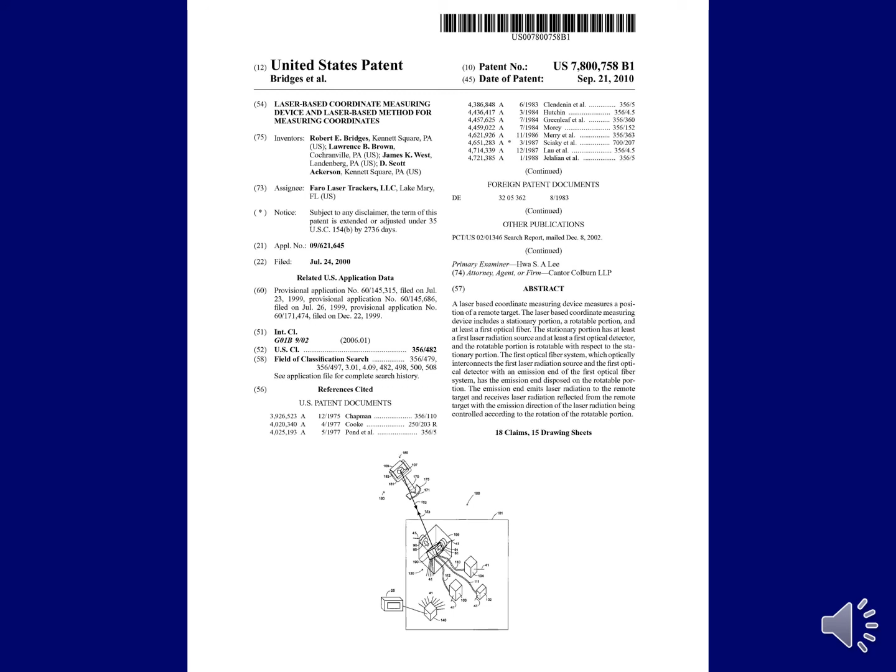And with that, that's the conclusion of my presentation. Like I say, a lot of this is the way I remember it, which may or may not be accurate. So if others see anything here that they disagree with, or that I've got wrong, please drop me a line and tell me what I need to change in case they ever do this again.